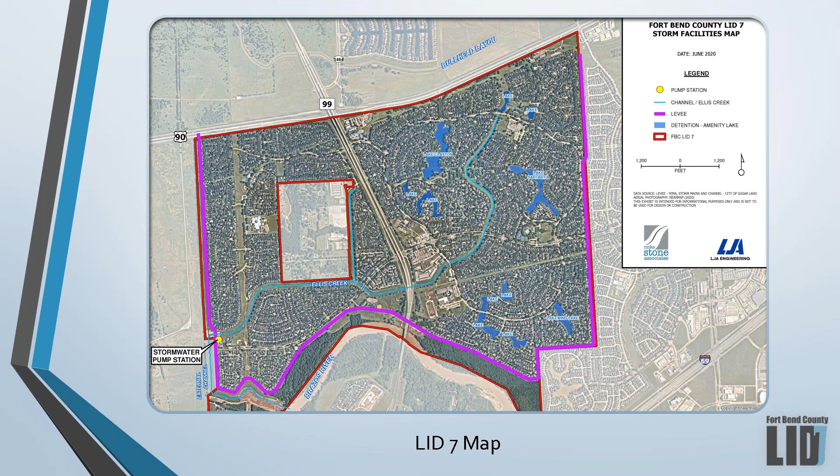Your levee protects us from that flood event. We provide enough storage and pumping inside the levee system, because during that event, water outside the levee is going to be higher than water inside the levee — at least that's the way we hope it is. The water can't flow out passively, so we must pump it out using the pump station and storing it in your channel and the lakes on the east side of 99. Those are the two events we deal with via your levee system.

So what does LID 7 do for you? It does two important things. First, it provides flood protection from flooding on the Brazos River. The levee system protects approximately 2,050 acres. Our levee system includes 6 miles of levees, a 66,000 gallon per minute pumping station, and 9 flap gates that gravity outfall into your external channel on the west side.

It also provides gravity flow. You have approximately 5 miles of drainage channels, including the external channel on your west boundary and Ellis Creek, which is internal to your district. We also have 10 detention and amenity ponds. One thing I want to clarify is that the storm sewers in your public roadways are not levee system facilities — those are owned and operated by the City of Sugar Land. The facilities the district owns and operates are those I just covered.

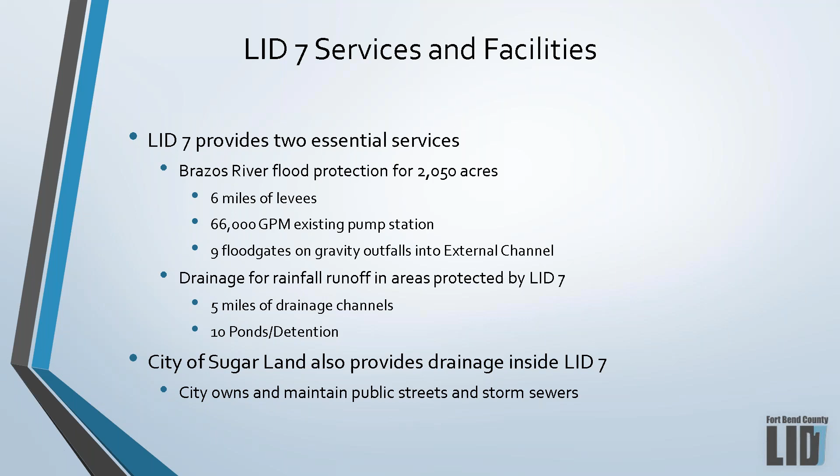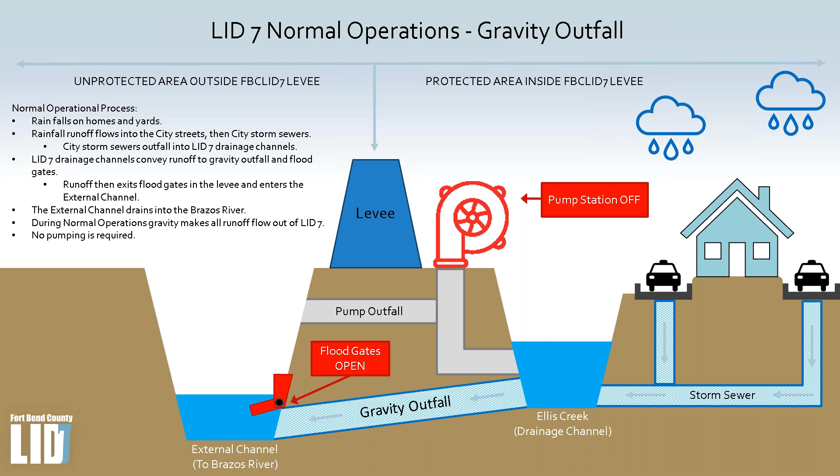Water falls internally, the coincident event, typically the 10-year event local. Your pump station will begin to operate and it will pump 66,000 gallons per minute of water under the levee into the external channel and ultimately to the Brazos River.

But as Jim had mentioned earlier when he presented, you're going to have, when we get rain locally, the pump station alone cannot get rid of all that water. It just does not have that much capacity.

So you need a buffering or a shock absorber, and that's your detention system. So Ellis Creek and the ponds on the east side of 99 are the shock absorbers, which allows the pump station to slowly pump the water out until we get the next event.

Which allows the pump station to slowly pump the water out until we get the next event. So it's important that we have both components, both the pumping and the storage, to make everything work efficiently.

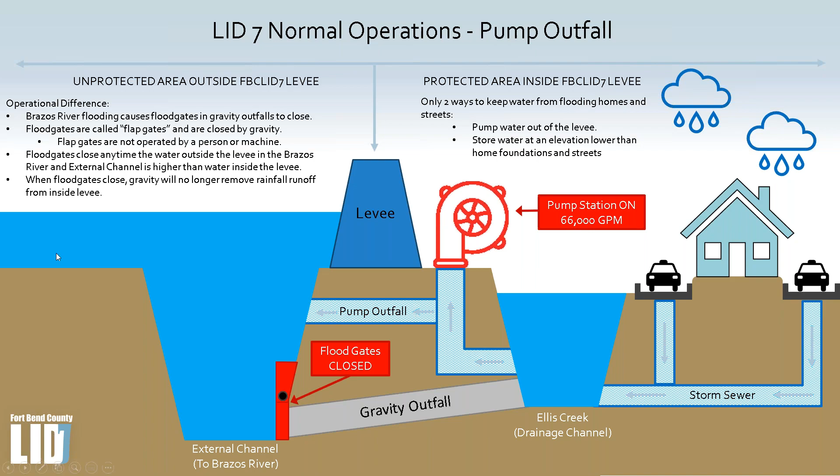Hurricane Harvey was an extreme event. It dropped approximately 30 inches of rain over 4 days within your area of Sugar Land.

Other areas of Sugar Land got more water. On top of that, the river was at flood stage. And if you remember the two scenarios I explained, one is a gravity and one is a coincident.

The coincident was designed for something less than what Harvey dropped on your district. The amount of water we designed for is less than 9 inches, and obviously there was much more rain that fell in your district.

During that event, approximately 3 structures were flooded, and you had widespread flooding throughout the community and a number of cars were also impacted.

Let's fast forward now to May 7th of 2019. We had another event that occurred in Sugar Land area. We had about 8 to 10 inches of rainfall that fell within a very short period of 4 hours.

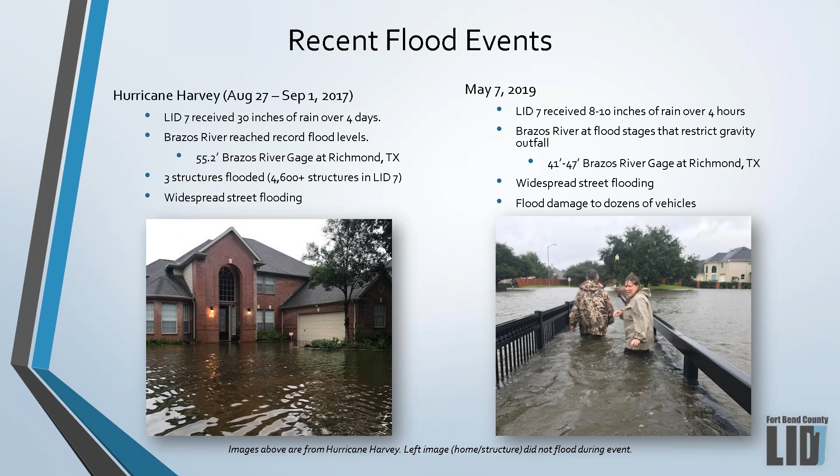Over the years, the various local governmental agencies have increased the design criteria for engineers, specifically for just everyday development.

Not necessarily just for levee improvement districts, but a lot of the same rules govern for levee districts. And if anything, levee districts have more requirements.

Back when your district was first created, the freeboard requirement for a levee district or for any structure in Fort Bend County was 12 inches.

And you're probably wondering, what is freeboard? Well, the definition is as follows. Freeboard is the vertical distance between the top of a structure foundation and the anticipated water surface elevation of a certain design storm as required by the governmental entity.

So we typically design, as I stated earlier, for the coincident event and for the gravity event. So for the coincident event, it's the 10-year storm locally.

For the coincident event, it's the 10-year storm locally. For the gravity event, it's the 100-year storm locally.

So what this means is that when we design channels internally or your storm sewers.

But for levee improvement districts, the channels, then what we do is we design the system so that whatever the expected ponding would be within the district is always 12 inches lower than the lowest minimum slab within the community.

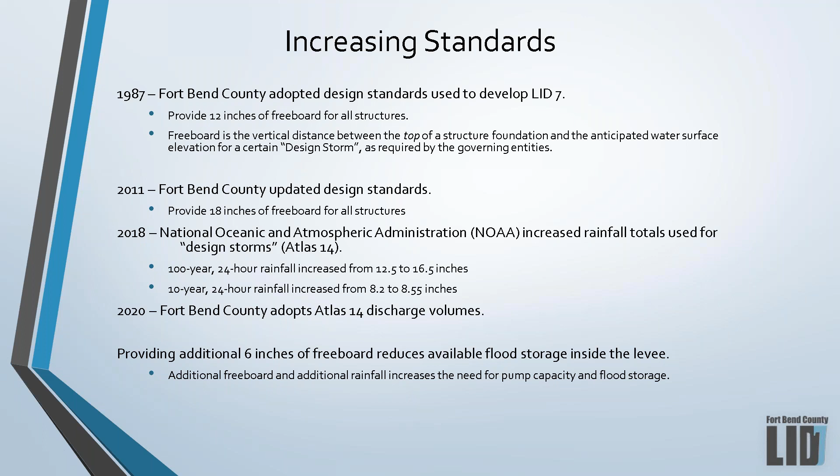So getting into more of the weeds on Atlas 14. Atlas 14 came out in October 2018 by NOAA. They released volume 11 of Atlas 14, point precipitation frequency estimates, using better statistical data. Understand, when we're talking about a 100-year event, they would have to have enough data to say that we've had events equating to what we believe as scientists to be 100-year events. But we haven't been around long enough, or haven't been keeping enough data, to accurately estimate that. So in the past, their estimate was 12.5 inches for the 100-year event. Now, looking at better information, they think it's closer to 16.5 inches.

So as I stated, both Fort Bend County and the city of Sugar Land have adopted this. Your district representatives believe that it's in the best interest of the district to also adopt this concept. Last year, I, as your district engineer, was asked to evaluate the district system without improvements, but using the 100-year Atlas and 10-year Atlas events on the district system, to see what would happen with those rainfall volumes. And we've completed that.

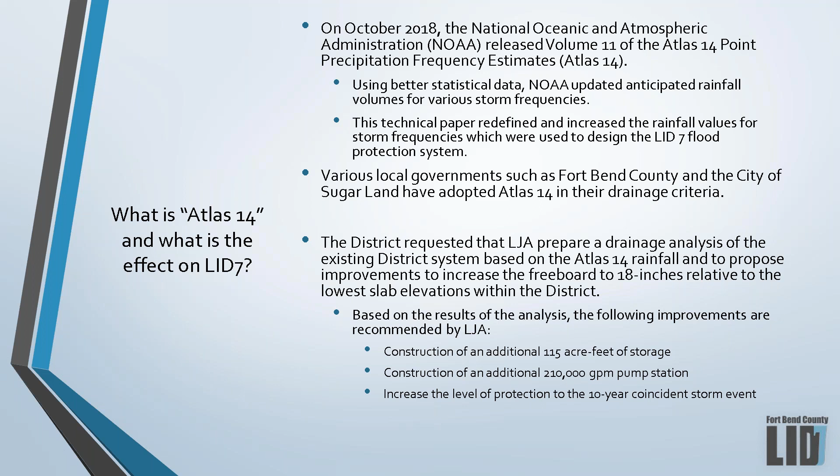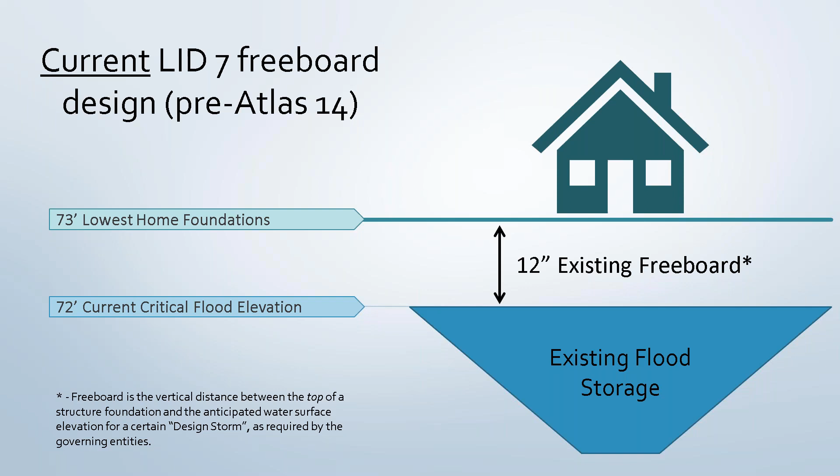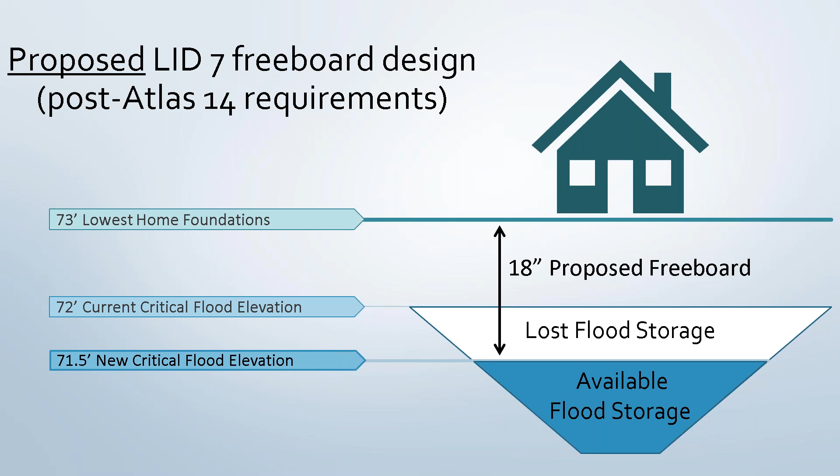If you adopt Atlas 14 and implement the additional 6 inches of freeboard, going to 18 inches of freeboard, then the internal water surface needs to be lowered to approximately 71.5 as your new critical flood elevation. As I explained earlier, you are going to lose storage in your existing system, but we're mitigating that by adding additional pumping and by acquiring more property to build additional storage to accomplish this goal.

So what's been done to date? In June of last year, the district authorized LJA to initiate the preparation of your master drainage update. This included modeling of the existing system, analyzing the existing system to accommodate the Atlas 14 volumes, and then implementing a proposed condition to increase freeboard, and subsequently recommending whatever improvements necessary to accomplish those goals.

In February of 2020, we began looking at various pumping station designs, preliminary engineering, and site locations.

Now understand that we can do this only because we had the modeling completed and we knew about how much pumping would be necessary in order to accomplish the goals.

In May of 2020, LJA completed our drainage analysis and submitted it to the City of Sugar Land and Fort Bend County for review, comment, and ultimately approval. Additionally in May, we completed our pump station design alternatives evaluation, and in June of 2020 we presented our recommendations to the board on what we believe would be the best location and pump station size to accommodate the ultimate goals for the district. In June of 2020, the district approved the recommendations presented by the engineer.

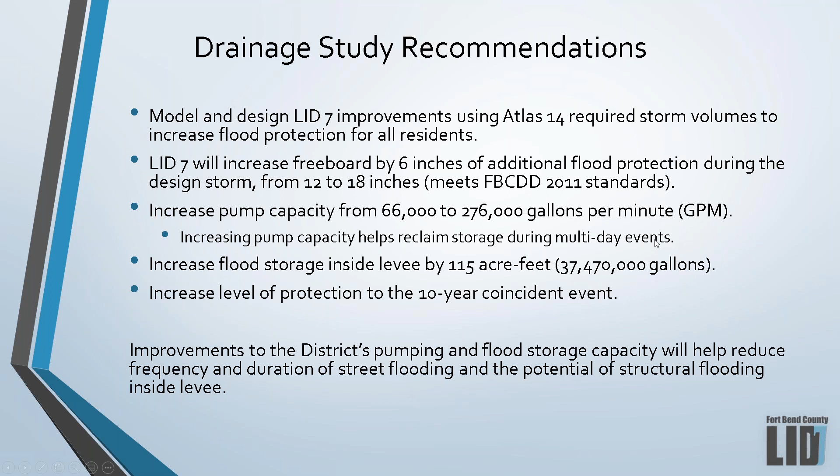This is a pretty provocative exhibit. This exhibit shows that if we put the Atlas 14 drainage on the district during the coincident event, this is when we do not have gravity outfall. If we make no improvements in the district system, we don't add 115 acre-feet of storage or 210,000 gallons per minute of pumping, this is what's going to occur.

The dark blue represents the flooding of the streets. The light blue is shallower depths within the lots. You can see there's numerical numbers around different areas of the district. Remember, my goal was to get the water surface to be no higher than 71.5. If we do nothing, we're going to far exceed those elevations within the system, and it would potentially result in flooding of lots, homes, and some commercial areas.

I was a little bit surprised. Up in the northeast side of the community, apparently we have some streets up in that area that are also relatively low. We did understand that in the southeast area of the district some of these structures that flooded in Harvey were located in this area. So the map makes sense, but I will say that I was surprised just how much of the levee district would be impacted.

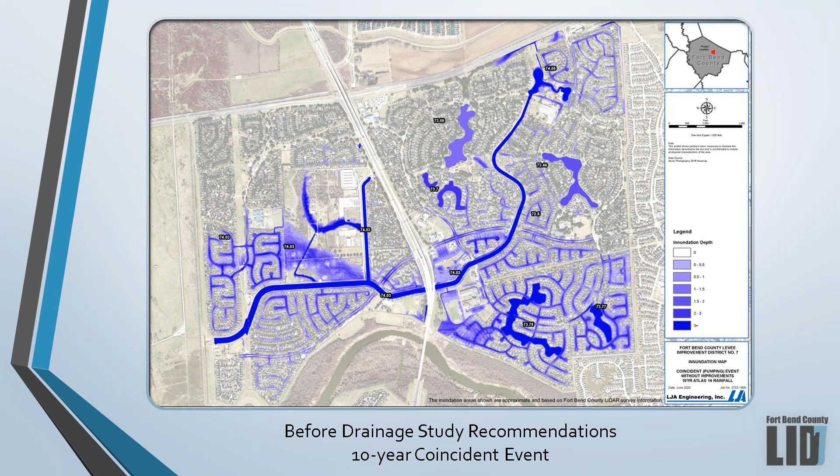This next exhibit shows, with the same rainfall event, the coincident event with the river up, if we made the improvements with the pumping and the detention, this would be the result. You can still see some ghosting of blue in some of the streets, but you're not inundating lots or businesses. And it's a significant improvement, and obviously it meets the goals.

The numerical elevations, you can see 7133, 7136 - we pretty well met it everywhere. You can see there's a 7225 right on the central eastern area; there's a lake there. There's a 7173 on the other side of Ellis Creek and a 7263. We have evaluated those elevations and we do not have an issue with that because we reviewed topography in that area and the plats for the subdivisions, and we still maintain a minimum of 18 inches of freeboard in those areas.

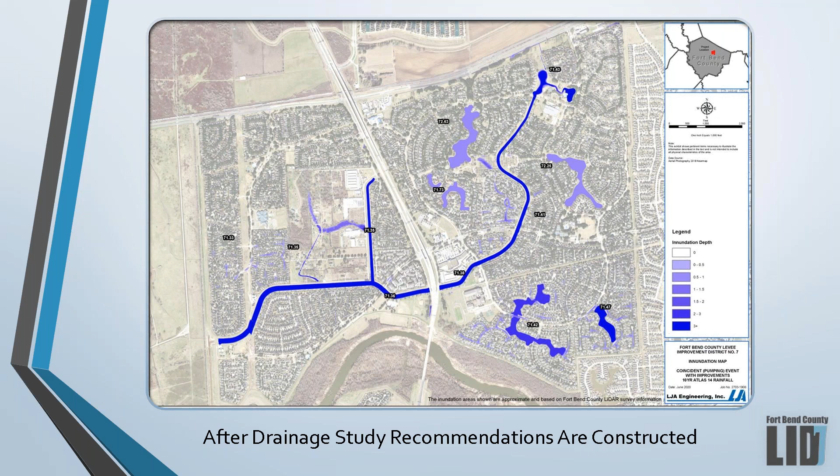So later in this presentation, I'm going to explain to you that we looked at 5 different locations for our pumping station. Obviously the first place to look would have been to expand our existing plant site, and that's where we focused in the very beginning. But in the end, what we found is that there are too many shortfalls on that site to make it a viable location to accomplish the 210,000 gallons per minute of pumping that we need.

The first issue is that plant is over 28 years old and it's nearing its useful life. The other thing that needs to be remembered is no matter what we do, no matter where we build the new plant, it cannot impact the ability to operate the existing plant. We must maintain flood protection to the district at all times.

Some folks have recommended that we just put temporary pumps out there and let that take the place of our permanent pumping station. That, as an engineer, makes me cringe, and I would never recommend that. That's not a reliable substitution of a permanent plant.

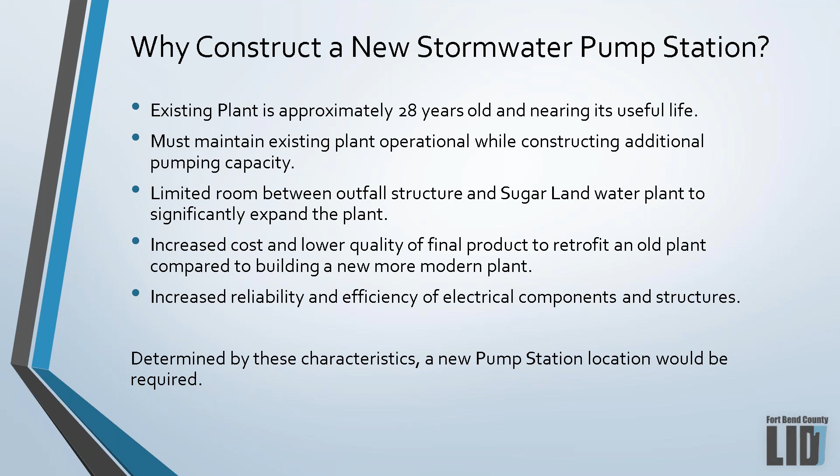So if we're not going to do it there, then where are we going to do it? What are the characteristics that we look for to locate a pump station? I can tell you the previous engineer, for the most part, got it right. The biggest hurdle for me, and one thing I didn't mention for the existing pump station, is access. If anybody's been out there to see this, the only way your operator can get in and out of that plant is to drive to the end of New Territory Boulevard and go up on a levee on a road that's 10 feet wide, then drop 8 feet into that plant site over a very short run on a very steep driveway. That is pretty bad access, okay? Everything else, I think they got right for the most part.

You need to locate the new pump station in the lowest part of your gravity system. The reason for that is the whole goal is to remove as much water from inside the levee to outside the levee. If you're upstream, you're not going to be able to remove all the water. You can have the biggest pumping station in the world, but you'll still have volume left. So you want it to be at the lowest end of Ellis Creek. So where the existing plant is makes sense.

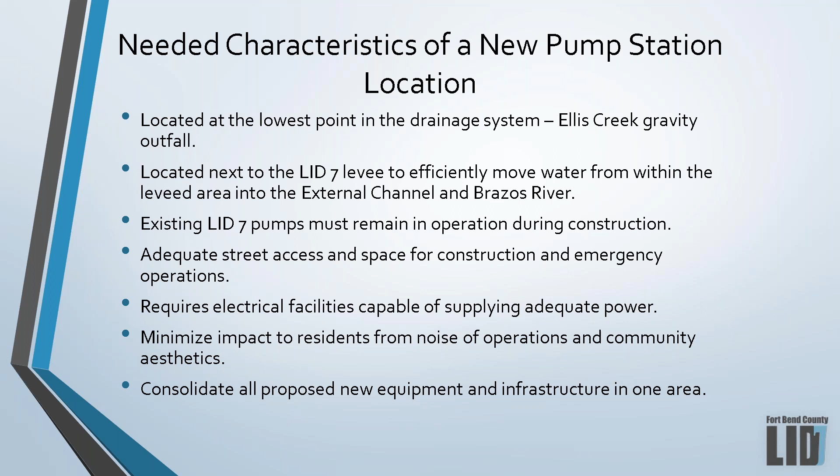The other thing that's really important is to consolidate all the equipment in one plant site. You never want equipment to be, say, a generator 500 feet away from other pieces of equipment in different places where your operator is going to be doing their day-to-day operations or dealing with your plant during an emergency. They're not going to potentially see something that's failing if it's 500 feet away, or to fix the problem becomes more difficult.

In the end, LJA recommended this option. This option is to acquire 3 lots, 3 homes, in the SF34 subdivision, and to build the intake structure within the district's drainage easement adjacent to the west levee, but north of the existing pump station site.

We've done something similar to this at the water reuse plant that we built adjacent to an existing subdivision within the community. And if you go out there, it really looks great. It really adds quality to the community.

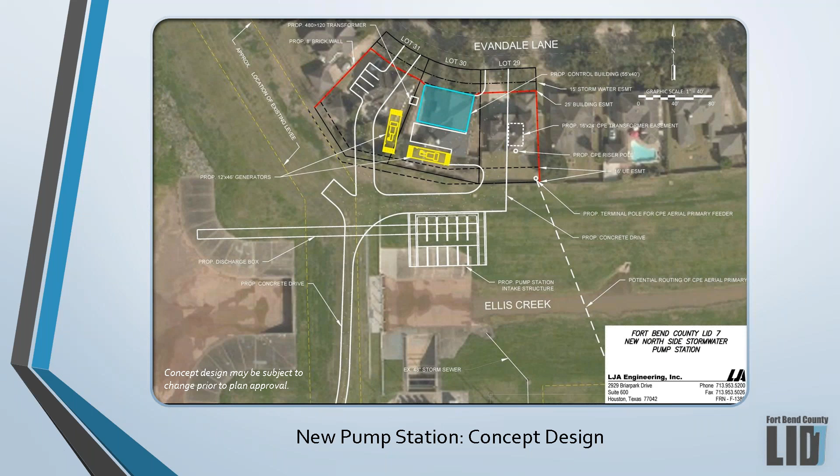So what were the different options that we considered? I'm going to briefly go through this. Please understand that I have posted my analysis on the district site, and there's a lot more detail included in that analysis to help anybody that's interested. So please review that. But as I stated, we looked at 5 different locations.

The first one was the existing plant site. As I explained, that is not an option in my opinion.

The second location we looked at are the baseball fields. There's a small park just to the east of the water plant that the city owns and operates. It's just south of Ellis Creek near the existing stormwater pump station.

Unfortunately, as I explained to you earlier, this requires very large pumps and generators, which adds cost to the project. It requires that we cross underneath Ellis Creek with the force mains, and it would require much longer force mains and a gravity outfall than we would recommend. We feel that this is not the optimal design, and it definitively was one of the most expensive options that we considered.

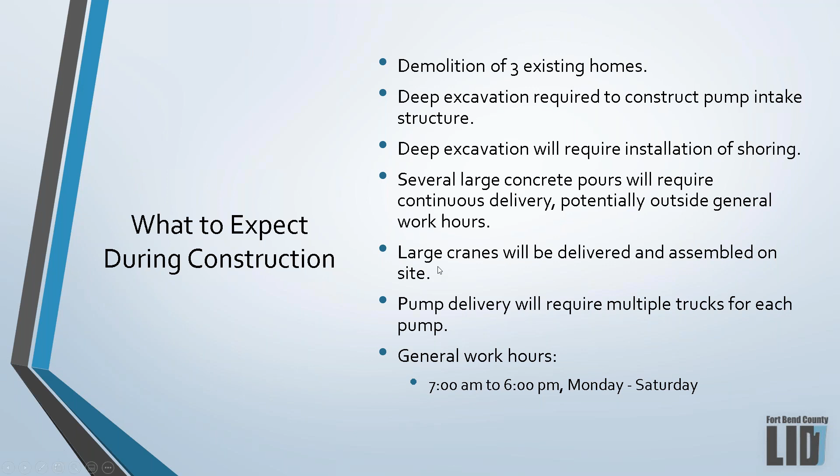At the end of the project, because it takes approximately 9 months to fabricate the pumps that we will need, about 9 months into the project we would have multiple semis delivering the pumps to have them installed. The general work hours are expected to be between 7 a.m. and 6 p.m. Monday through Saturday, but that could fluctuate depending on the needs of the contractor.

One thing that's very beneficial is we have Mike Stone and Associates as a consultant for this district. LID 7 is not the only levee district in the greater Sugar Land area doing the same thing we are. LID 2 is in the process of building a pump station, much larger, but within their community. So some of these things are second nature to Mike and his guys.

But the things they've experienced with neighborhood concerns are the transportation of vehicles in and out of the neighborhood. We have really no other way of getting to this site other than through new territory. We will work with the contractor to minimize the route that he takes.

We are going to make sure that he does not park equipment or trucks in the public streets, that they will be forced to park only within the construction site. And if he cannot, that he has a secondary staging area somewhere else that prevents him from cluttering the streets with equipment, so that we don't have major impacts to any of the residents in the area where this plant will be built.

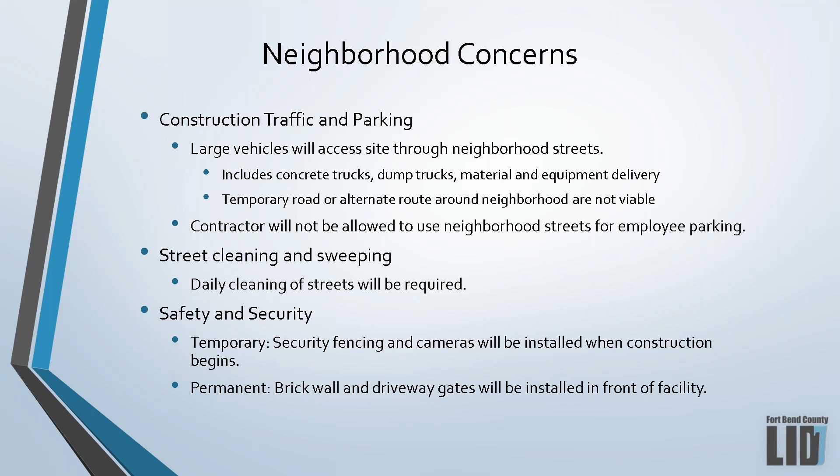What to expect after construction? There are two things that need to be stated here: what to expect before we design, and what to expect after construction. This district is committed to the residents of New Territory that this facility is not going to be some industrialized looking facility. They have committed to hiring architects and going the extra yard to ensure that we can save as many trees that exist in the front of the lots of these three lots we're trying to acquire. They're going to plant additional landscaping in front and within the plant site to provide shielding from the adjacent residents and to make this facility look and complement the community.

The plan, like I stated earlier, is to put a brick facade on the building, a brick wall, and a standing seam metal roof. I've also found that there are roofs made of metal that look like standard shingle roofs. That might be another concept we implement. But the point is that we're going to have an architect on staff. We're going to put some renderings together, both for the buildings and for the landscaping, and this is going to be shared with the community.

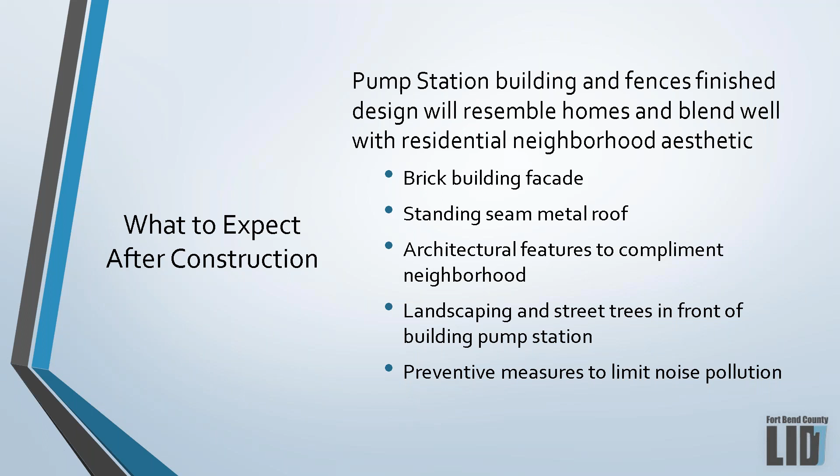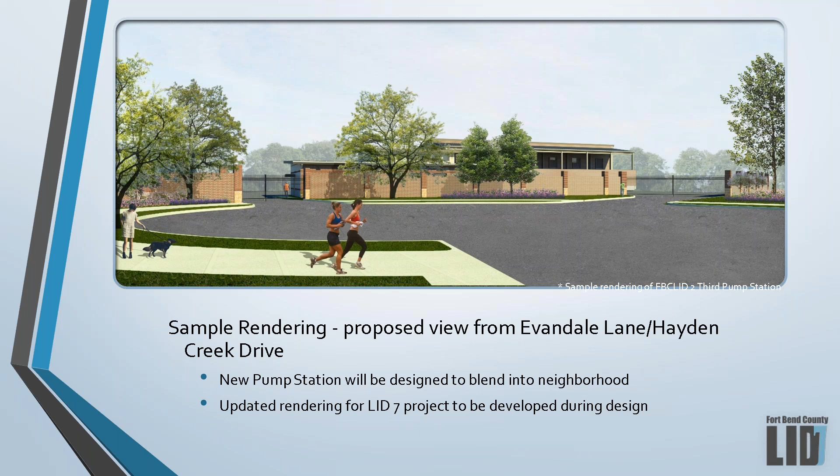LJA has put together a cost estimate for this project. The anticipated construction cost is approximately $10,500,000. Engineering is about 1.9 million. Property acquisition, legal, and expenses is approximately 1.2 million. So the total cost expected is approximately $13,573,000.

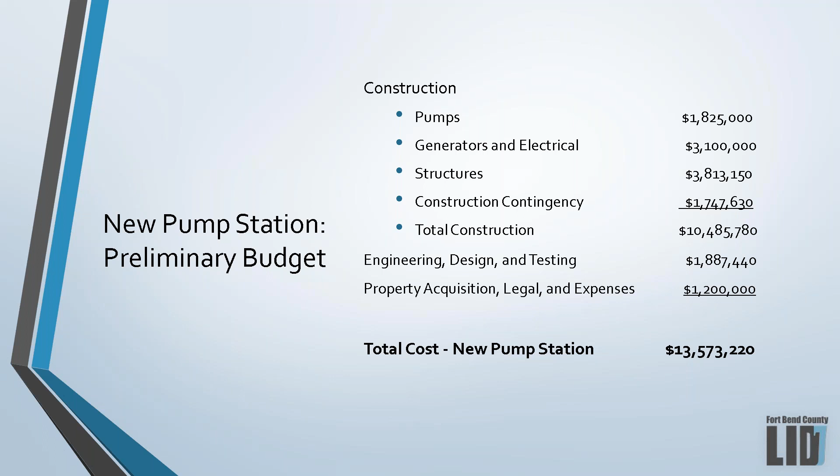As you all may know, this project and the others I mentioned earlier are a few of the projects planned for the district to improve flood protection within its boundaries. Back in 2018, LID 7 voters approved a bond election in the amount of $121,150,000. I know your board is looking everywhere they can to not spend this amount of money. They're trying to find grants or inexpensive financing to fund these projects. As I stated earlier, your financial advisor has put a number of financial analyses together and has recommended to the district a tax rate of 43 cents per 100 assessed value. We believe this should be enough to cover the costs of the projects we've discussed today.

Benefits to New Territory: we have $1.5 billion worth of value within the leveed area of the district, and preventing flooding in the district is a very important goal for your board, and I would assume for the rest of the residents in the community. Having a reputation, I know as an engineer, if some project has a reputation of having a flooding problem, those projects don't do too well. That could potentially impact values in your district, and the goal is to not allow that to happen. We believe by implementing what LJA has recommended in our drainage study, we will improve drainage within your district and get it closer to meeting the criteria of the governmental entities which govern your area. We feel the flood protection improvements are going to benefit all residents of the district.

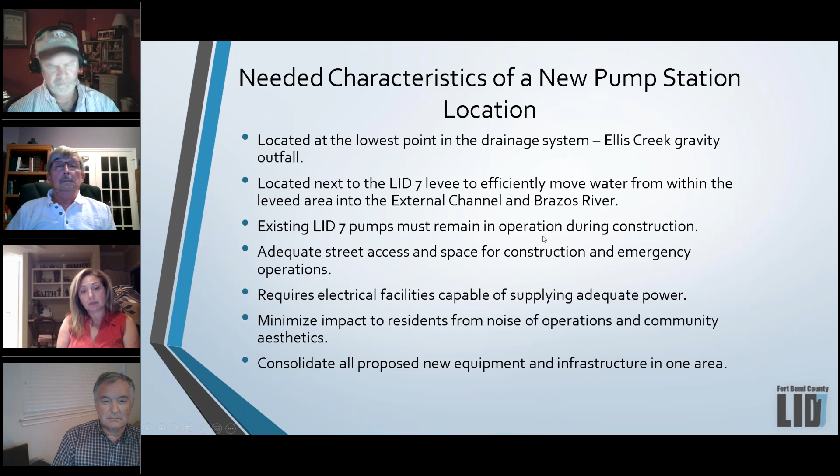Yeah, let me answer that also. So yes, the topic was discussed. On June 4th, when we made a decision on the pump station, we also made a decision on the detention. The location of the detention is in the out-tract. If you go back to Bill's original overview of new territory, there's a square section within new territory that is not part of new territory, and not even part of the city of Sugar Land. I'll let him scroll there. So it's right in this area here is where we're looking.

And so that involves the acquisition of land, similar to what we're doing here for the pump station. It is sensitive, but we know the location, we know the design. We've reached out to all of the landowners. We're well along in that process. It does not affect any new territory homeowner, but it does affect at least one other homeowner living in the out-tract.

And in this process, we strive to treat everyone with a maximum amount of dignity and respect that everybody deserves. So we're trying to move methodically through that to acquire that land. But we have found the land, we know where we're going, and we are on the path to implement the new 115 acre feet.

Let's leave it there, Michael. Are there other questions? There are other questions.

The next one is, what's the status with regards to the levee, as far as maintenance or increasing its height? No plans to increase the levee height. We feel that the existing levees on the east, south, and west side are adequate. We have plans to address the corners, the northeast and northwest corner. And then the board has not yet begun discussions about what a north levee solution looks like. There are other projects in play regionally, but to answer the question, there's no plans to raise the height of the levees. We feel those are more than sufficient.

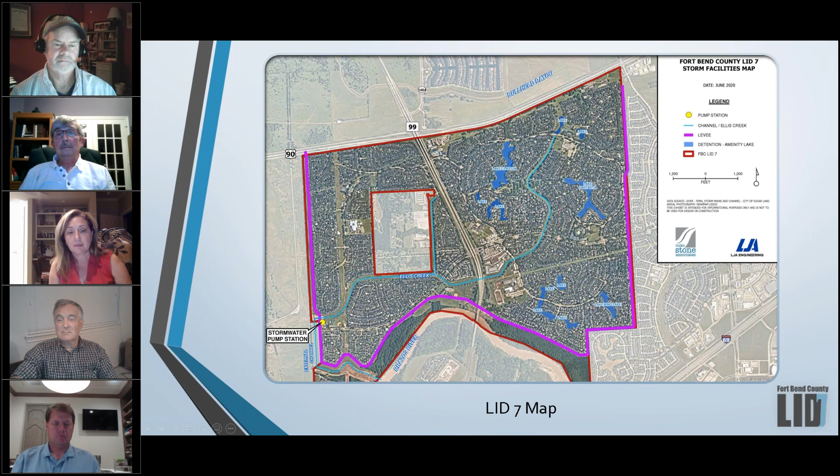Michael, are there any other questions being offered? It does not appear that there's any other questions at this time. Okay, any concluding remarks from the board? Not from me. Anybody else want to speak up?

This is Director Picasso. I just wanted to tell everyone thank you for being on the call tonight and for caring enough about what we're doing to ask questions. There were some very good questions asked tonight, and we really do appreciate all of your feedback and questions.